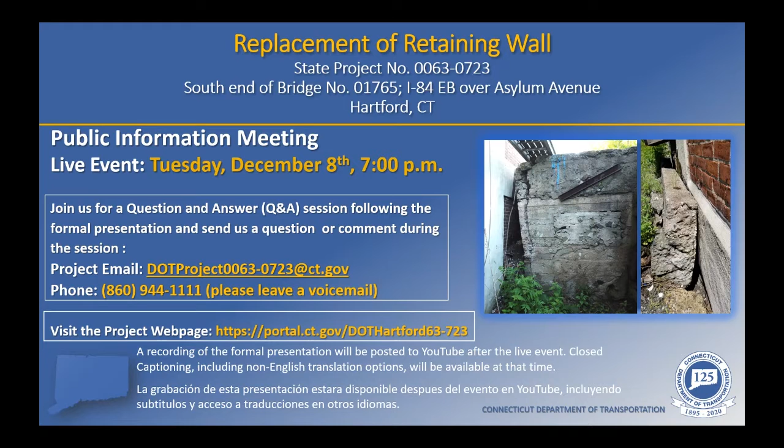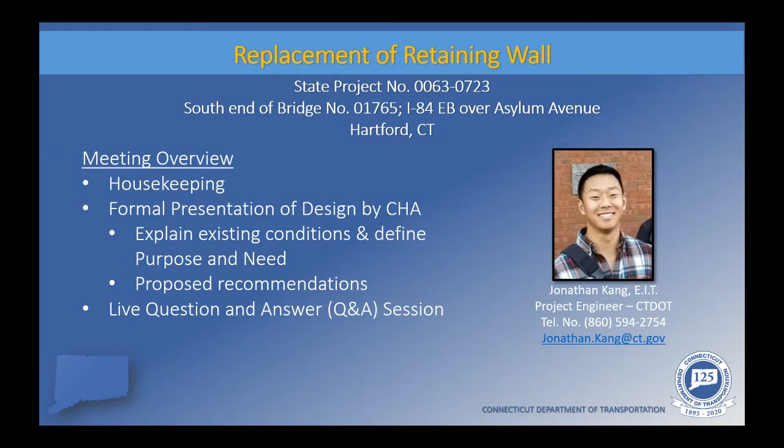My name is Jonathan Kang, and I am a project engineer with the Connecticut Department of Transportation. Before we begin the presentation and introduce the project team, I would like to go over a few housekeeping points and explain the format for tonight's meeting. The meeting will consist of two parts and last approximately 20 minutes. The first portion will consist of the presentation of design by the department's consultant liaison engineer for this project, CHA. This will be followed by the second portion, where we will host a live question and answer session.

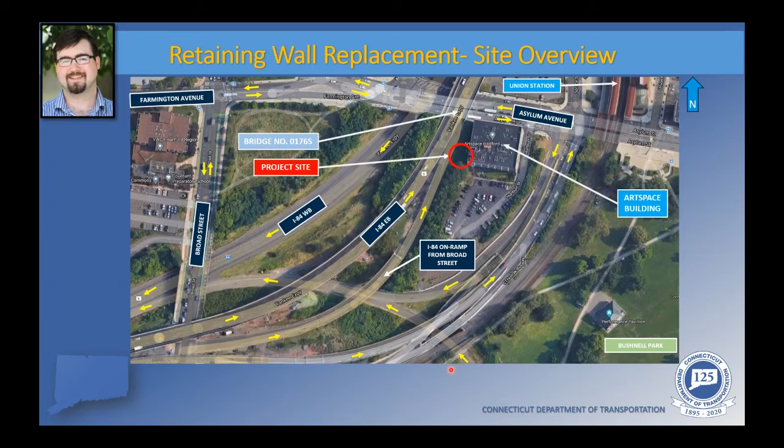This next slide shows an enlarged map of the project site. As I mentioned in the previous slide, this project involves the replacement of a failed retaining wall located on the south end of bridge number 1765. This failed wall is outlined here on the screen in red. You'll also notice that most of the wall runs parallel to the ArtSpace building, as it runs off the screen and continues to the southwest end of the building, as you'll see in upcoming photos.

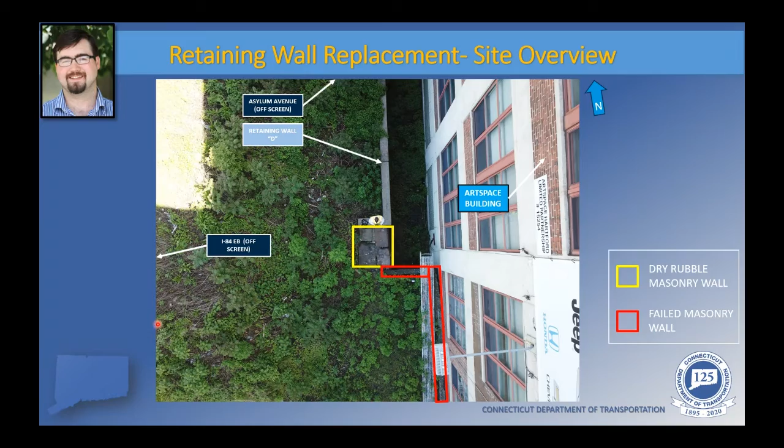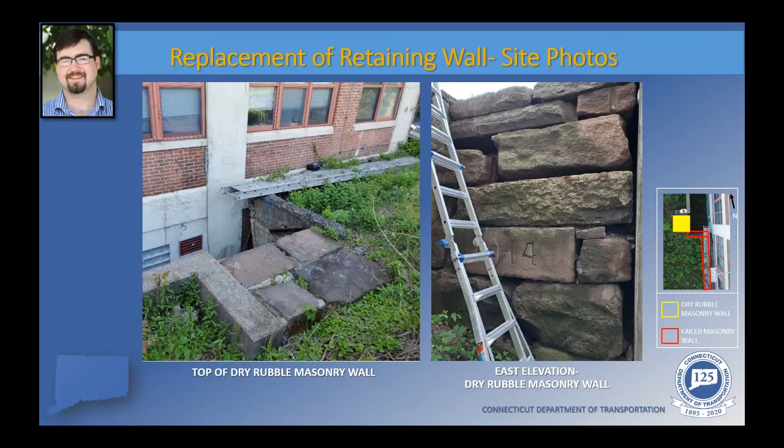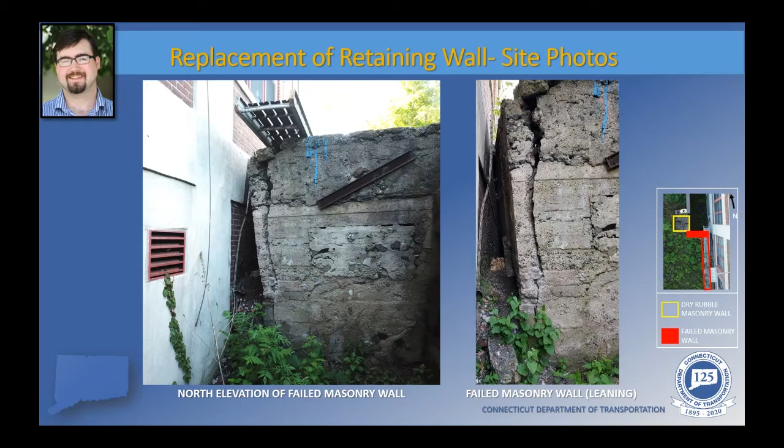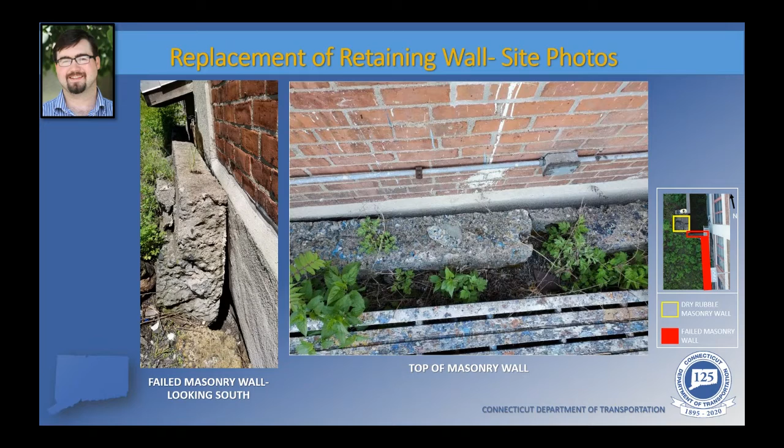On this next slide, we have photos of the east section of the failed masonry wall. The photo on the left shows the south end of the failed wall looking south. Here you can clearly see that the wall is resting on the ArtSpace building. The photo on the right shows a typical portion of the top of the failed masonry wall, along with a portion of scaffolding laying on the ground within the area.

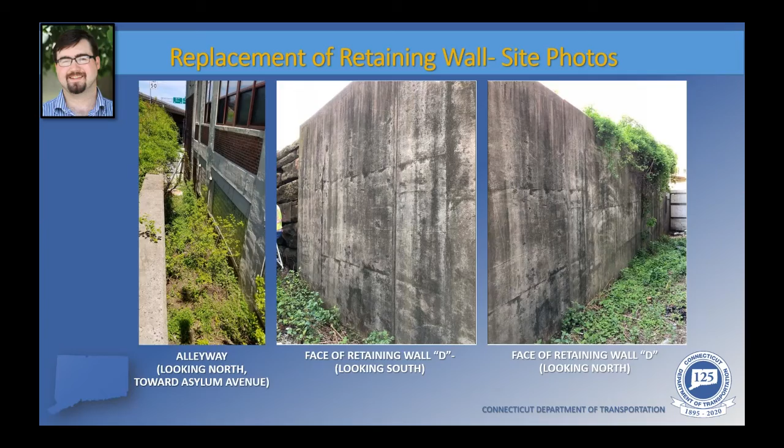The photos in this next slide are of the embankment of I-84 eastbound. The one on the left shows the embankment looking north, and the one on the right shows it looking south. Here you'll see some pretty overgrown vegetation within the site.

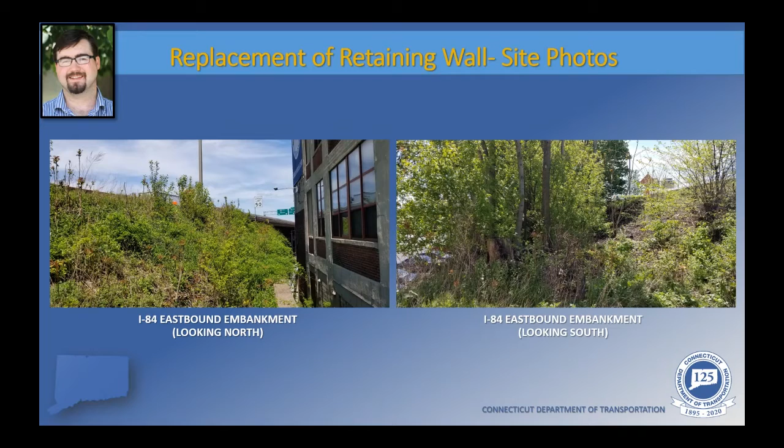Now that we've reviewed some general location maps and photos of the project site, we can discuss the overall scope of this project. This project will include the removal of both the failed masonry wall and the dry rubble masonry wall. A new soil nail wall will then be constructed to replace these walls. The photo in the upper right of this slide shows an example of a soil nail wall during construction.

An underdrain will be installed to collect groundwater from behind the newly installed wall, which is not anticipated to be a large amount. This underdrain will run through the alleyway and connect to the catch basin on Asylum Avenue. There's currently an underdrain connected to the same catch basin from behind retaining wall D. Part of that system will be replaced, and the rest will be tied into the new underdrain system.

Here is a photo of the catch basin looking south. The ArtSpace building is here on the left. You have retaining wall D on the right, and the alleyway is behind the board, which is probably constructed to prevent unauthorized access to the alleyway, and also provides a nice mural in the process.

Lastly, as I said earlier, any issues with retaining wall D are anticipated to be addressed as part of this project as well, since the contractor will already be working in the area. Only minor cracks were noted during the designer's assessment of the wall, which should be patched as part of this project also.

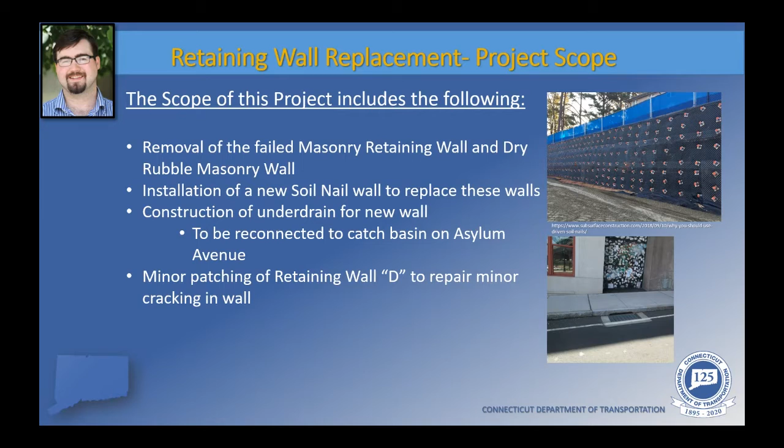These next several slides will show the preliminary project plans as of up to this point. We'll start here with the slide showing the preliminary plan of the new proposed soil nail wall location.

North is pointing to the top of the screen. There's a legend shown here on the left, which will serve as a guide to let you know what the colors in this plan represent.

Here is the estimated location of the existing failed retaining wall and the dry rubble masonry wall. You'll notice the outline of the west side of the ArtSpace building right along here, so you'll see just how close that existing wall is currently to the building.

That red slightly dashed line that you kind of see right here following parallel to the building is actually the right-of-way line, showing where state property is estimated to end and the ArtSpace property begin. As you saw from the photos earlier, the failed wall is estimated to be leaning within the ArtSpace property right-of-way.

This dashed line here shows the underdrain, which is proposed to connect to the catch basin on Asylum Avenue, as shown in that earlier photo.

Here's the location of the proposed wall. As you'll see, it's set pretty far away from the building. There's another section proposed here as well that attaches to retaining wall D, which is part of Bridge 1765, as we discussed earlier.

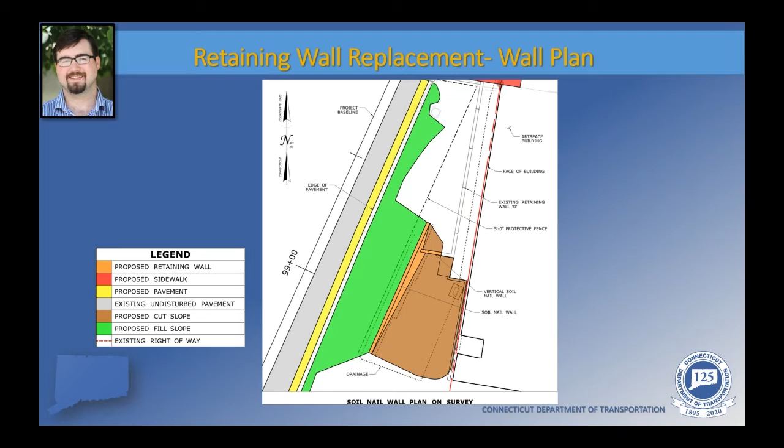Here on this slide, you can see a section of the longer proposed soil nail wall accompanied by an elevation of the shorter one. Starting from the ArtSpace building, right here, you have the alleyway shown here with the underdrain, and then retaining wall D.

The shorter wall then butts up against retaining wall D here and continues almost to the face of the longer wall, as you may recall from the plan view. Then again is the section right here through the longer wall, where you can see how it's set back from the building. The wall will be constructed at a 3-to-1 slope.

Here are the soil nails, shown in typical fashion in dashed lines, which will be anchored into the ground, tying the concrete facing of the wall back and holding back the I-84 eastbound embankment. The soil nails are also indicated by these symbols here in the elevation of the shorter section.

You can see what the soil nails look like in typical fashion here in this construction photo, which was copied from the project scope slide. You'll notice a note calling out a decorative architectural facing on both walls, which is just shown typically here.

The department is hoping to provide something much nicer than what's currently out there, although a decorative style has yet to be chosen. It also shouldn't look like this either, since this photo seems to be taken while construction is still progressing. There is a protective fence shown above the wall for safety considerations.

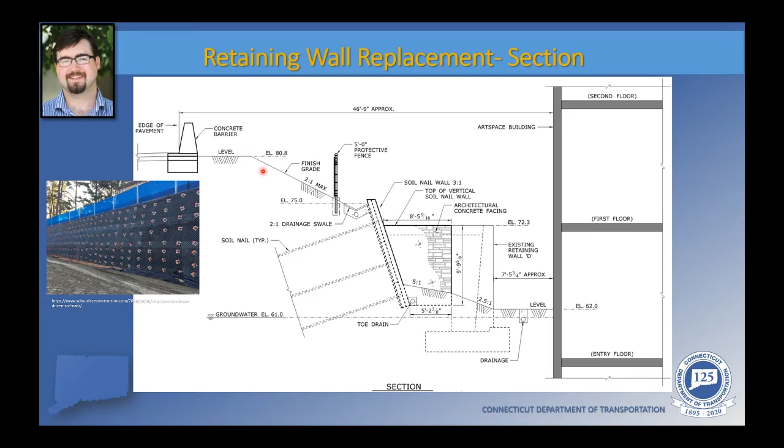You'll see also that much of the soil will be removed in this area here, and a portion of the embankment next to I-84 eastbound will be leveled out prior to establishing a finished grade slope of 2-to-1.

Here we have the longer portion of the proposed soil nail wall in elevation view, showing the wall's face, and a section of the shorter wall right here next to retaining wall D in this area, which continues off to the screen on the right.

On the previous slide, we saw a section of the longer wall and the elevation or face of the shorter wall. Essentially, this view is what you would see when facing the highway.

The new longer wall is anticipated to measure 58 feet in length, slightly longer when compared to the length of the failed and dry rubble masonry walls, which were estimated to be roughly 45 feet long and 8 feet long, respectively.

These symbols shown right here represent the estimated location of the soil nails, which, as we discussed before, would tie the wall back and hold back the I-84 embankment located behind the wall that's drawn in here. So pretty much as if you were looking beyond your screen, just to help you picture it in 3D.

Here's the protective fence, again shown atop the wall for safety considerations. Here in the foreground, you can see the shorter wall in section view. Again, here are the soil nails shown as if going through the ground to tie the wall back.

This dashed line right here represents the anticipated finished grade or ground behind the soil nail wall. You'll notice that this will taper down in front of the longer wall here at a 4.5 to 1 slope. The ground behind the shorter wall and retaining wall D will remain flat, and then taper down to a 2 to 1 slope to a height just shorter than the top of the wall.

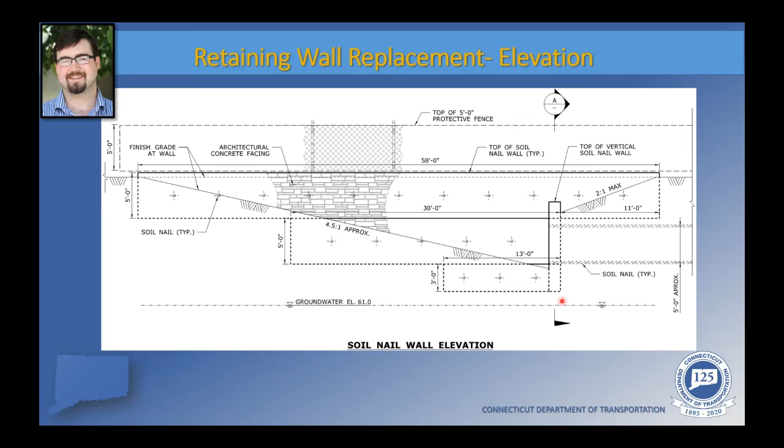On this next slide, we have a preliminary highway plan shown. North in this plan is off to the right. As with the enlarged plan shown earlier, there's a legend here on the left. We've already walked through the enlarged plan, so this will be more of an overview of the rest of the area, although I'll still point out the cut slope area here.

You have the fill slope area here, which actually continues along most of the embankment. Shown over here is the anticipated area of the access road, which is to be restored after use. Up top, you'll see a slice shown in yellow of existing pavement that is to be repaved along the I-84 eastbound roadway, depending on construction.

Over to the right, shown in red, is a section of the sidewalk, which will be reconstructed once the work involving the drainage tie-in to that catch basin on Asylum has been completed.

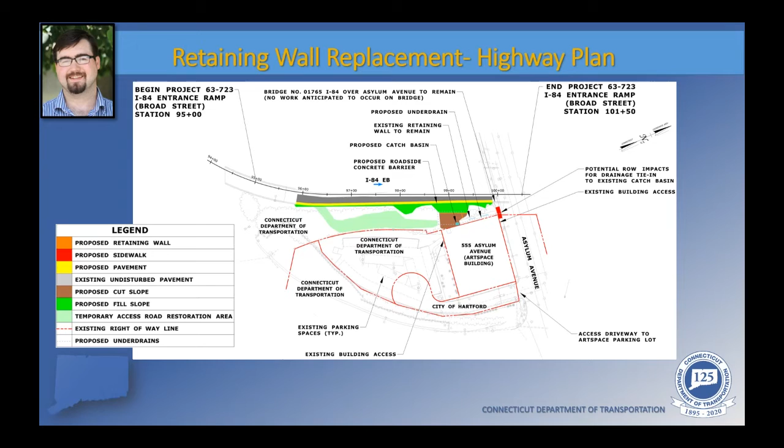The red lines that you see in this plan that have some partial dashes represent the estimated right-of-way lines. As you can see, pretty much the entire project is anticipated to be constructed within the state's right-of-way. Part of the work involving the drainage tie-in may cross the state's right-of-way over here into the city. And we also have from the previous enlarged slide a little bit of the crossing into the ArtSpace right-of-way as well. We'll discuss these possible right-of-way impacts in a later slide coming up.

This slide and the next one will show the two alternative access road layouts currently being considered by the designer. The first alternative, which you see here, reflects the anticipated work that was shown in the highway plan we reviewed a couple of slides ago.

This version of the access road would allow for construction vehicles to enter from the Broad Street on-ramp to get to the construction area here. Construction vehicles then have to travel back up the embankment and then exit to the Broad Street on-ramp and out I-84 eastbound. Again, as we discussed before, this would maintain that most of the construction activities would stay within the state right-of-way.

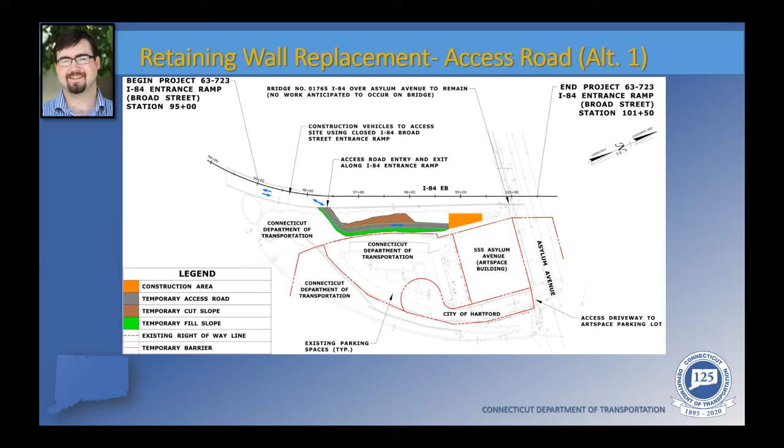Now this slide shows the second alternative being considered, which would allow for construction vehicles to enter from the Broad Street on-ramp to the construction area, and then instead of exiting up top, actually exit through the ArtSpace parking lot using the driveway and then out onto Asylum Avenue.

As you can see, the state not only owns the land closest to the highway up here, but also owns a portion of the parking lot behind the building right here, which leases to the building owner. The city of Hartford seems to own the driveway portion over here.

Utilizing this alternative should still ensure that most of the construction activities, again, remain on state-owned land, including this additional area noted up here. But the department's still weighing the impact that this alternative would pose. As of right now, this alternative would require the use of these 4 parking spaces right here.

Per our preliminary coordination with the property owner, there are roughly 70 parking spaces with an estimated 60 of them currently being utilized. Therefore, using those 4 spaces for construction should not impact any spaces currently in use by any building tenants. But the department's always looking to ensure that they do their due diligence to be mindful of any possible impacts to the public.

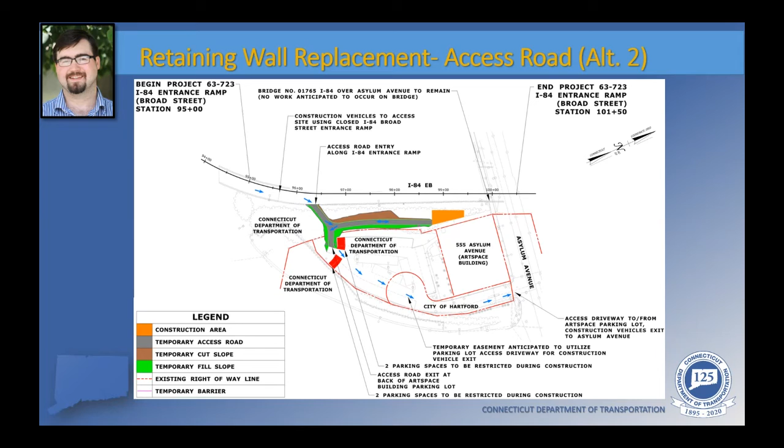So as of now, this alternative is being considered secondary, but we still want to make sure to present it to you tonight to give you an opportunity to see it and ask any questions and provide any comments that you may have.

Those access road slides provide a perfect segue to talk about the Maintenance and Protection of Traffic, or MPT as it is usually abbreviated. Construction will result in the need to close the I-84 eastbound Broad Street on-ramp, possibly for several weekend periods, both on and off peak, in order to facilitate access to the project site via the access road. This will allow the contractor to maximize their time and effort and help reduce the need for them to continuously remobilize their equipment and materials.

During this time, a motorist detour will be in effect. Temporary eastbound lane and shoulder closures may also be necessary to facilitate the work at the barrier wall along the embankment of I-84 eastbound. This would require traffic to be shifted over safely into the other travel lanes. Alongside Asylum Avenue, temporary right lane and shoulder closures may be necessary to facilitate the drainage work to be done at the sidewalk. As with the I-84 eastbound lane closure, this would require traffic to be shifted over safely into the other travel lanes.

During this time, the sidewalk will be closed within this area and a pedestrian detour will be in effect. We'll talk about this and the motorist detour on the next couple of slides.

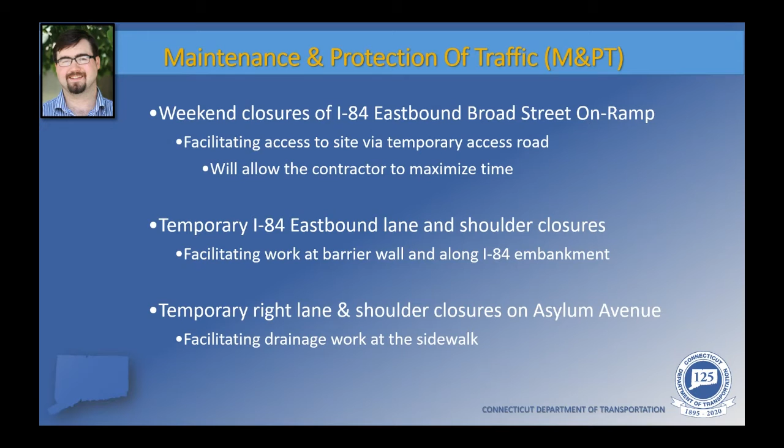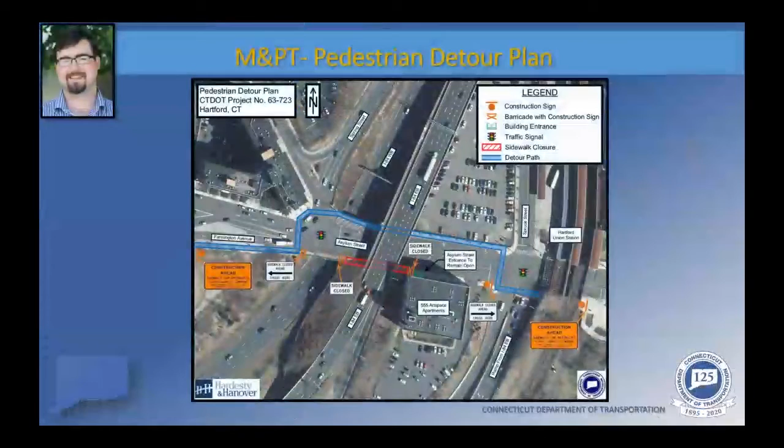Now that we have discussed the anticipated motorist detour, shown on the screen currently is the recommended pedestrian detour. As noted in the legend at the top of the page, the recommended pedestrian detour route is indicated in blue. Beginning on Farmington Avenue, the pedestrian detour includes crossing Asylum Avenue via the existing crosswalks at the intersection of Asylum Avenue, Farmington Avenue, Garden Street, and Spring Street.

Pedestrians will then continue eastbound along the sidewalk on the north side of Asylum Avenue. Pedestrians can then cross back over at the intersection of Asylum Avenue and Spruce Street and get to wherever they need to go from there.

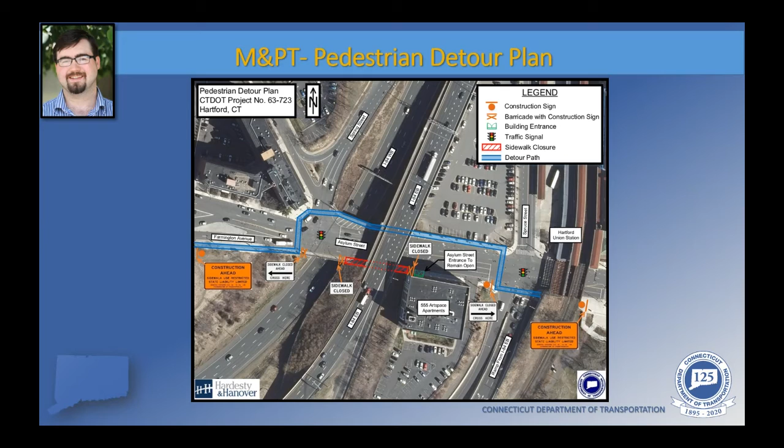This detour will be in effect when the underdrain work along Asylum Avenue begins here in front of the ArtSpace building. While this work is going on, this entire stretch of the sidewalk is anticipated to be closed to pedestrian traffic up to the front double doors of the ArtSpace building. It's currently anticipated that these doors will remain open and should not be impacted by construction. Again, applicable signs will be on display during the operation of the detour.

Next, we will discuss the possible utility and environmental impacts that this project may cause. In terms of utilities, while there are existing illumination, such as street lights, and communication utilities noted, which run along the sidewalk just outside of the ArtSpace building entrance, no utility impacts are anticipated. With the connection of the underdrain to the existing catch basin on Asylum, it is anticipated that these existing utilities will be avoided and may be protected during construction if necessary.

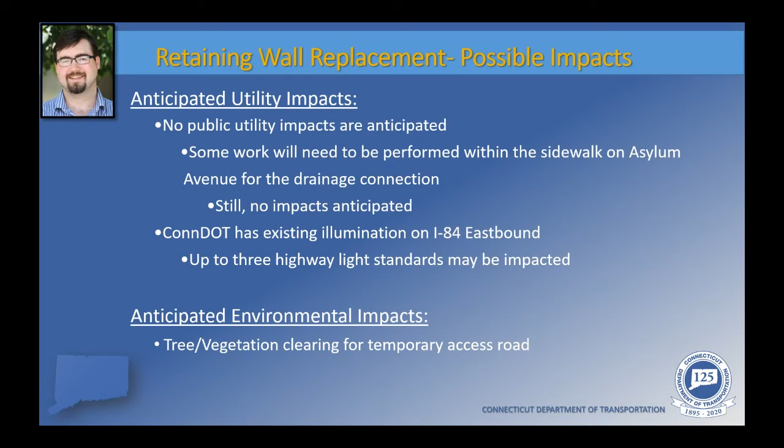Alongside I-84 eastbound, the Connecticut DOT has existing illumination, highway lighting, and existing ITS services which run adjacent to the roadside barrier. Because of site accessibility needs, up to 3 highway lights within this area may be impacted in some way. The existing ITS services allow the operation of a traffic camera within the area and will need to remain operational during construction. In terms of environmental impacts, as we discussed earlier, vegetation overgrowth and the clearing of various trees will be necessary, especially when creating the temporary site access road. But the area is anticipated to be restored following construction activities.

A construction easement may be necessary when performing work alongside the ArtSpace building, due in part to the current failed wall resting on the building itself. In addition, a construction easement may be necessary for drainage work at Asylum Avenue. Lastly, a temporary access easement may be needed to utilize the ArtSpace building driveway if access road alternative number 2 ends up being utilized.

Coming up, we have Matt Giannakopoulos of the Connecticut Department of Transportation's Rights-of-Way Unit, who will be joining us momentarily to provide some general information involving the rights-of-way process. Before I pass this over to Matt, I have one more slide for my portion, where I will discuss the general project schedule and cost.

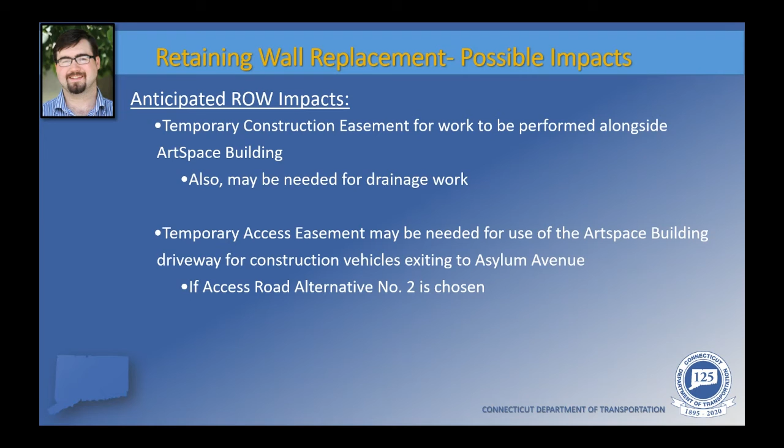Before I wrap up my portion of this presentation, I wanted to provide a brief overview of the anticipated project schedule and costs. Currently, this project is expected to begin construction in the spring of 2022 and finish in the fall of 2022. The anticipated construction cost is roughly $1.7 million, with 90% federally funded and 10% covered by the state. Please note that the current project schedule and costs are preliminary and subject to change.

At this time, I'd like to hand things over to Matt Giannakopoulos, again of the department's right-of-way unit, to provide some general information on the rights-of-way process.

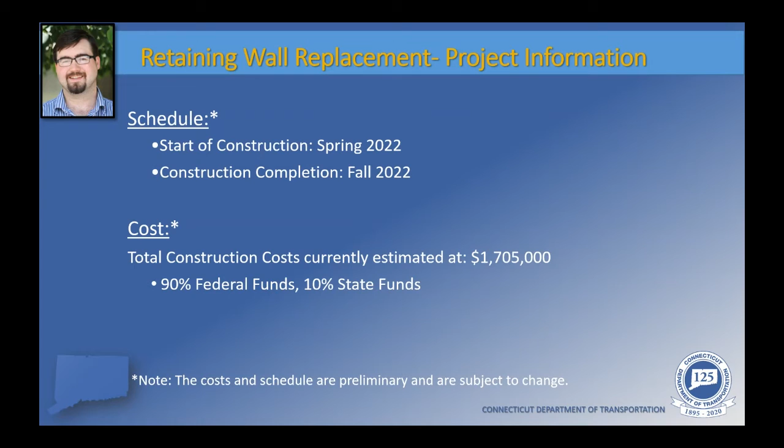My name is Matt Giannakopoulos, and I am a project coordinator with the department's Division of Rights-of-Way. It is our office's responsibility to acquire the property rights needed for transportation projects. The proposed project design requires the acquisition of property rights, so I'd like to give a brief overview of the department's right-of-way acquisition process. Please keep in mind that the specific impacts are still being fine-tuned and may change as the design progresses.

Any property rights required will be acquired in accordance with Connecticut General Statutes Sections 13A-73 and 13A-98E. Whenever there is federal money used in any aspect of a project, the department must adhere to the Uniform Relocation Assistance and Real Property Acquisition Policies Act of 1970, as amended.

Once the design has moved to the point where we are ready to begin the acquisition process, each affected property owner will receive a formal letter of intent to acquire from our office, along with a property map which depicts the exact property rights to be acquired.

At that point, our office will determine the fair market value of those property rights and use that value to establish an offer of just compensation.

That offer will be sent out to the property owner in writing, and a right-of-way agent will be available to meet with the property owner, explain the project, go over the specific impacts to their property, and explain the state's offer. The property owner will have a reasonable time, typically at least 30 days, to consider the state's offer and enter into negotiations.

When an agreement is reached, the state will prepare all the necessary paperwork and record the deed and the property map on the town land records.

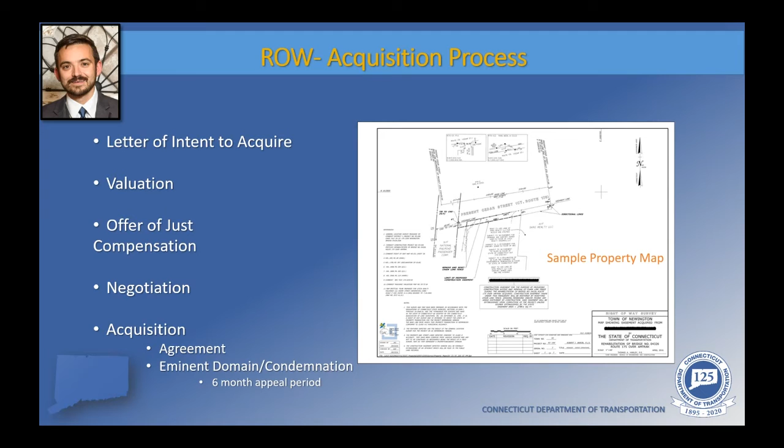If there are any questions regarding the department's right-of-way acquisition process, I'd be happy to address them once the presentation has concluded.

Okay, thank you very much, Carl and Matt, for the presentation. Ladies and gentlemen, this concludes the presentation, and we will now begin the live Q&A or question and answer session. So we encourage everyone who is with us tonight to put forward any questions or comments that they may have.

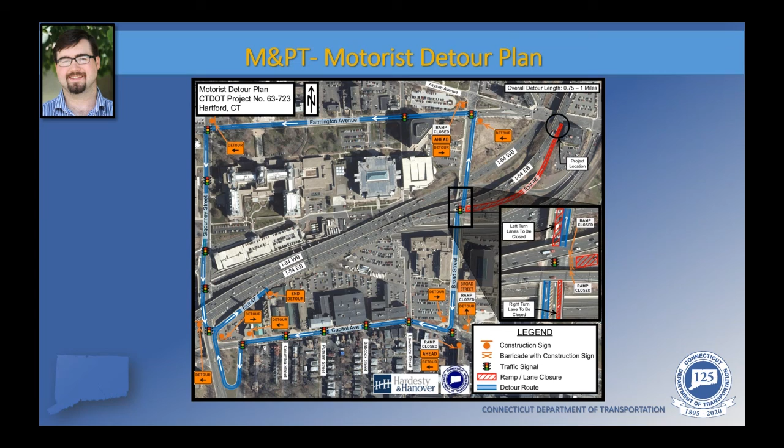I can go back to the motorist detour here, and you'll see the various detour signs posted throughout the detour when in use. All right, thank you very much, Carl.

We'd like to reiterate once again that receiving feedback through public involvement such as tonight's meeting is very important to the department's success to provide the services needed through projects such as the one presented tonight.